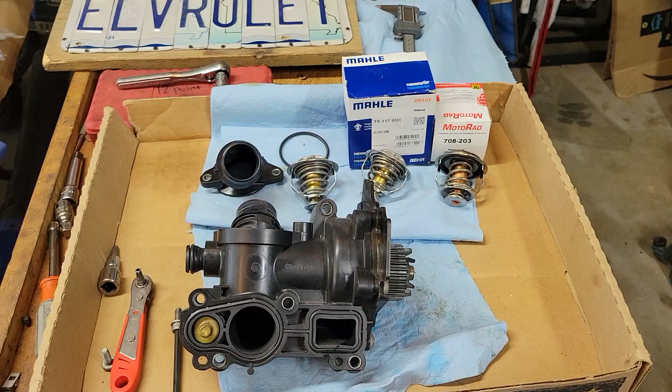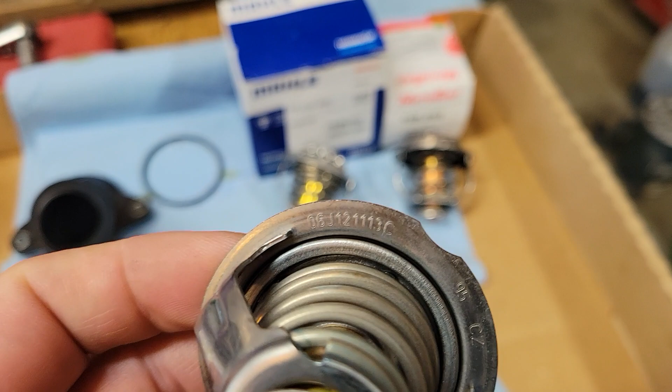Today we're working on a thermostat replacement on a 2010 Audi A4 with the 2.0 turbo, and there was confusion about which thermostats to purchase that will fit and replace the original. So this is the original. It's got the Audi 06J, all the numbers on there.

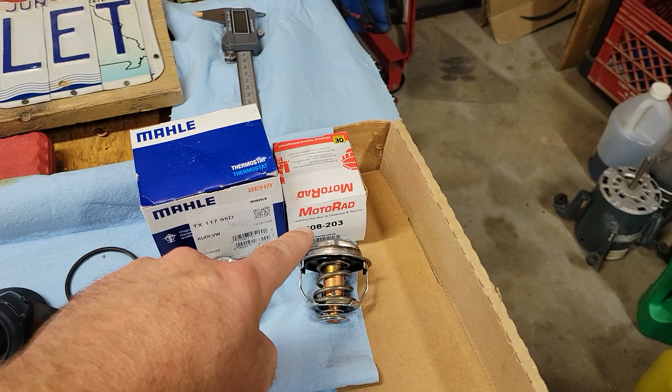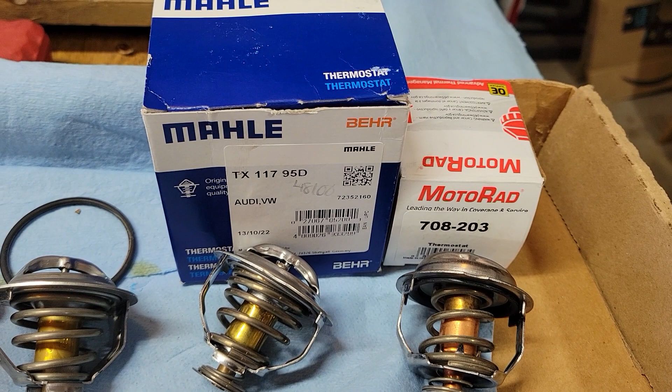When you look up online, just like your local auto parts store, you get this Motorad 708203, but there's controversy about it not fitting, so I ordered another one through Mahle, which I guess bought Behr, something to that effect, with that code there, and I did the measurements on it so everyone could see exactly how they line up. I'm going to put these in one at a time.

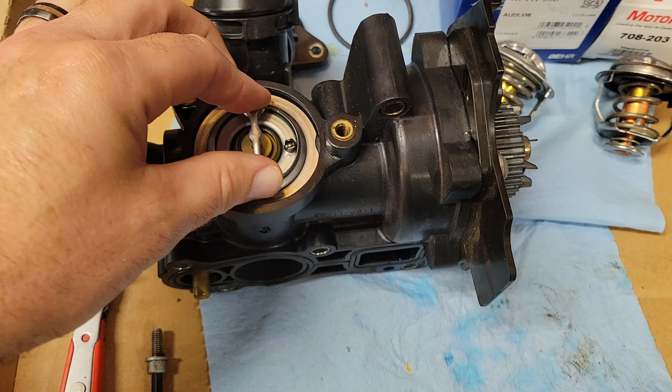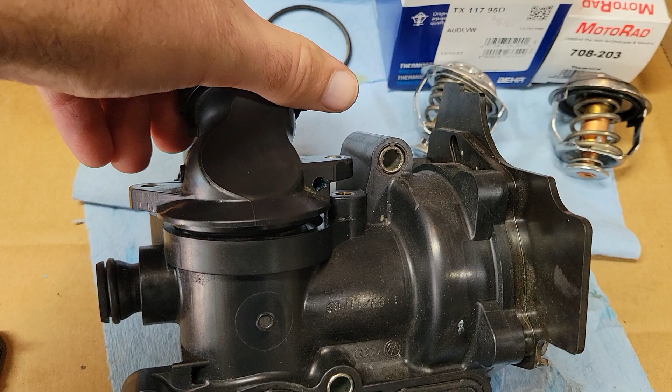So this one came out like this, and you can see there's little grooves on those brackets, and there's little grooves inside the water pump where this is supposed to slide in and lock in place. Doesn't move, it's nice and flush. And then this, of course, will have its O-ring sitting in here, and then that will sit down nice and flush.

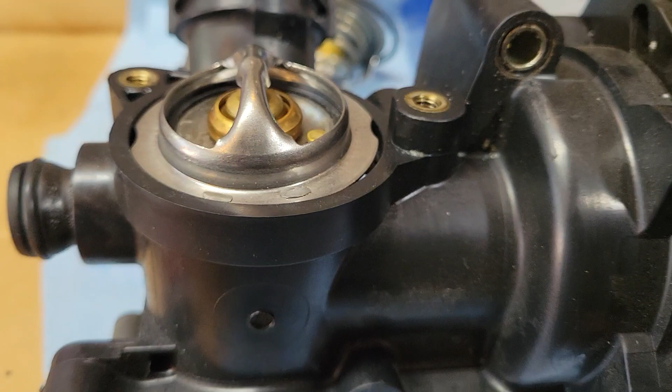Let's pull the Motorad. It's got little cutouts in the bracket, so let's try to slide that in. That's not sitting in there. Pick it up and turn it. Now it fits in there, but it's loose. And that does not want to sit flush, and that's even with the O-ring not in it.

Now let's try the Mahle. It's the Behr. See, it's got the grooves in it, and that fits perfect just like the original one does. And that one seats down.

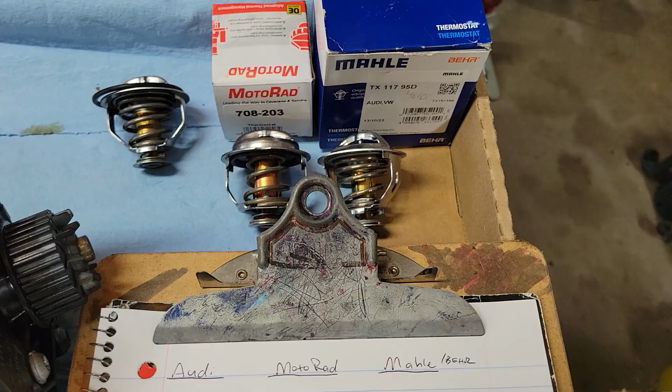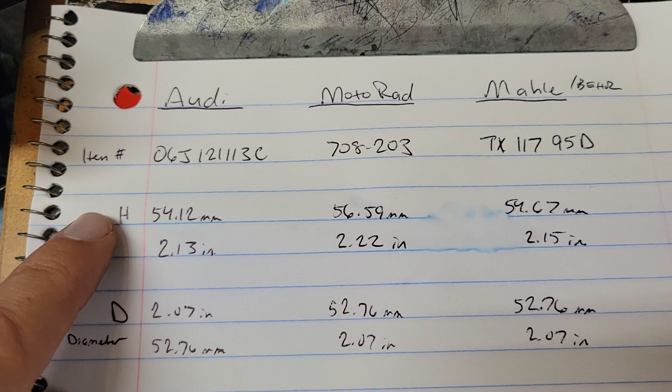So let's go over the measurements. Let's see what that looks like. Okay, so this is the sequence that the chart runs. So this is the original that I pulled off, and this is the MotoRad replacement, the Mahle or Behr replacement number. Now this is an 06J thermostat and thermostat housing instead of 06H, which is INZI, which has a different looking thermostat altogether. So you have to find out which one you have to even order the right part to begin with. So H is for height, so that would be total height top to bottom.

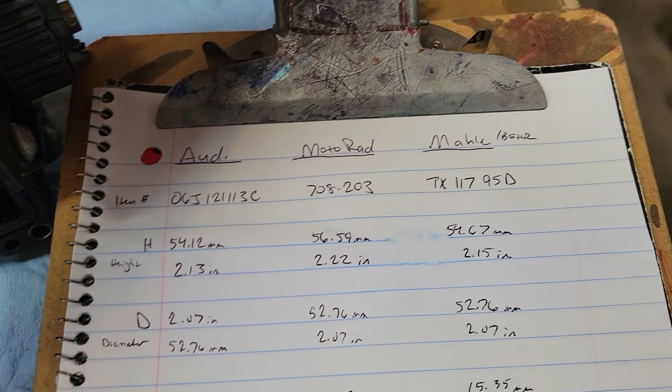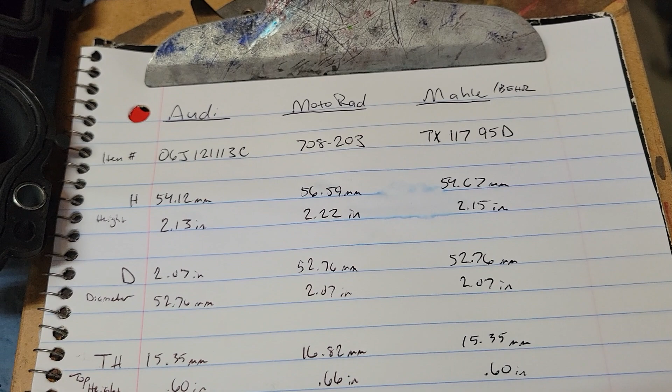And you can see that the MotoRad is actually taller than the other two as well. And then the diameter is going to be just the diameter across this way. And the diameters are all spot on.

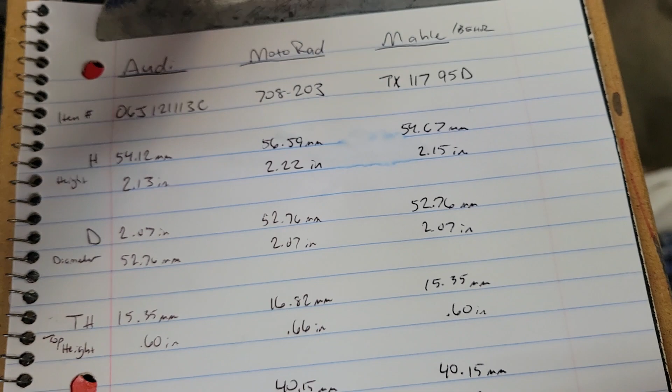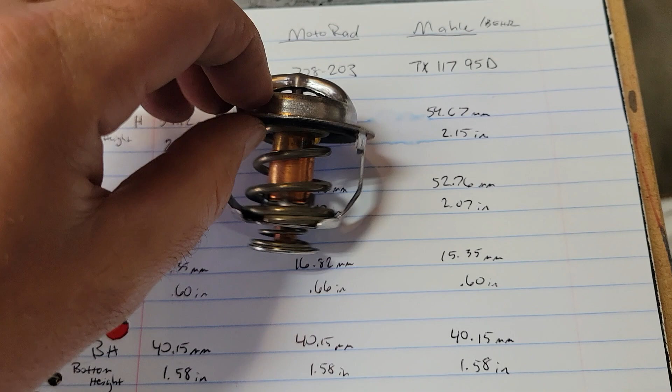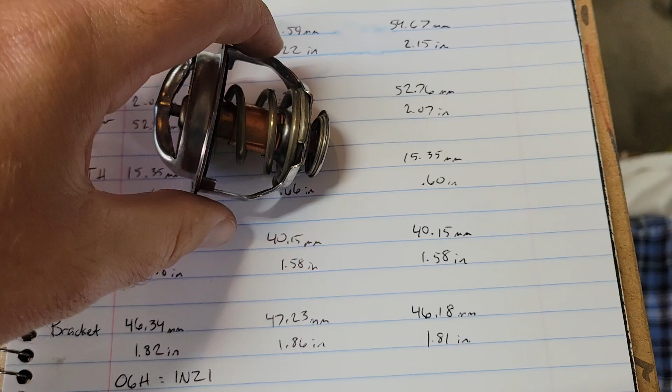The top height I did separately, so just this, from this top piece to this base, as the MotoRad was taller, and then the base height was all the same, so from this lip here to the bottom, and then the bracket itself, so that's got those grooves in it, so the width between here to here, again the MotoRad was larger, so I don't know why they say the MotoRad is a direct replacement, because it absolutely does not fit and is not a direct replacement.

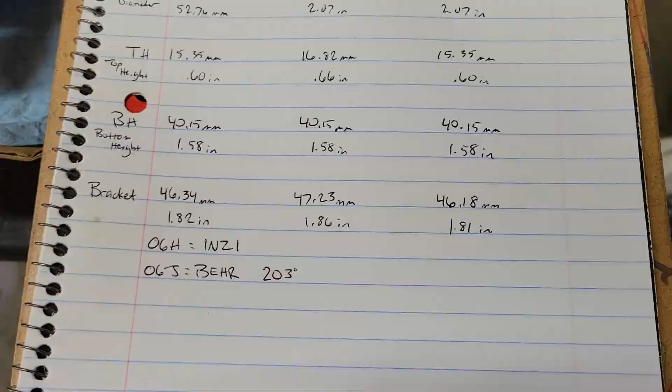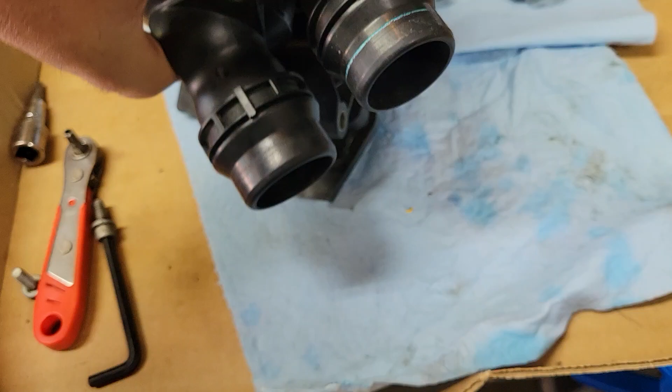Something else I wanted to do was just remove this while it was on the car without taking the water pump out. I just wanted to remove the thermostat. So when this is sitting in the car, it's very much like this. The problem is the way it's leaned and the way there's a bump out here in the car, so you can barely get this T30 bit out, and you have to use something like this to have room to get this out, and even then it's difficult to get your fingers up under there.

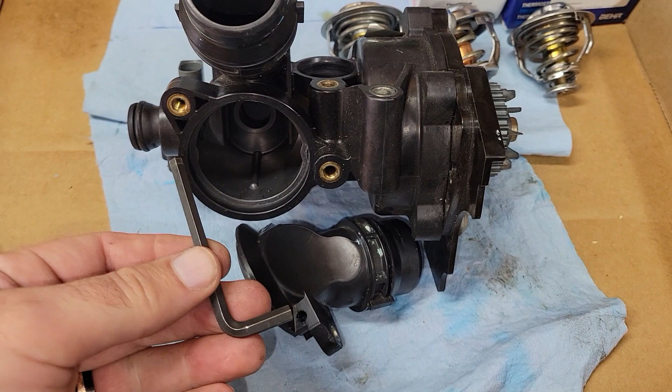This other screw back here, I didn't know it at the time, but it's actually a 5mm Allen head. I assumed it was a triple square like everything else on this car, but it was not. Potentially, I'd already took the water pump off because I found that after the fact. Potentially, you could actually get an Allen wrench in here and take this screw out and be able to pull this out and leave the water pump on. So maybe, maybe not, but I'll have to find out a different time.

And the reason I'm replacing this is because we got a 2181 code, coolant, some sort of error. And I did my live data with my scan tool, and the car is only reaching 172 degrees on top end when it's hot. These are supposed to be at 203 degrees, so the car wasn't getting hot enough. I assumed it was somewhat stuck open, just keeping coolant flowing through.

So anyway, it took me a while to figure all this out, and hopefully it helps the next guy out who wants to change their own thermostat without going through all the troubles of ordering this, taking it apart, and realizing that this piece of garbage does not fit at all. So hopefully it helps you out, man. Thanks.